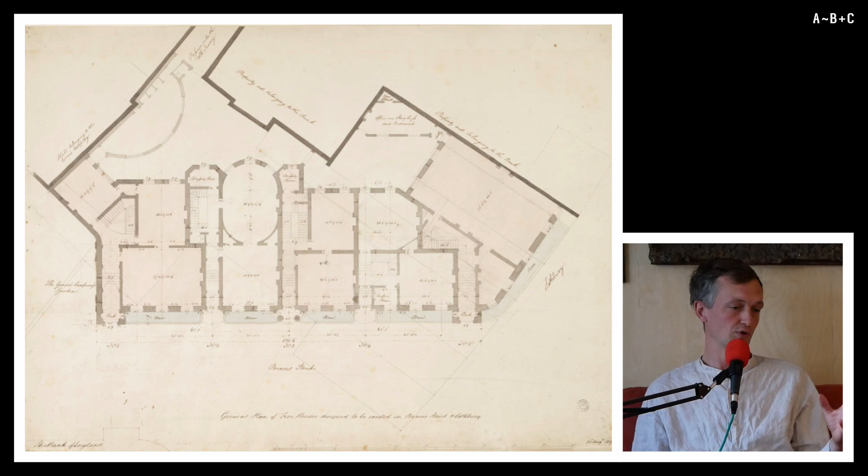You can see it shares DNA with a Nash terrace or a square, but it has some significant differences. There are stylistic differences, but then also it feels like it's not a whole block, but it's a block building. Well, it changes it a lot that it's in the existing City of London, so the geometry of the site is much more complicated. It's going around a corner, and it's a slightly irregular corner, and that's something Soane has to make something of.

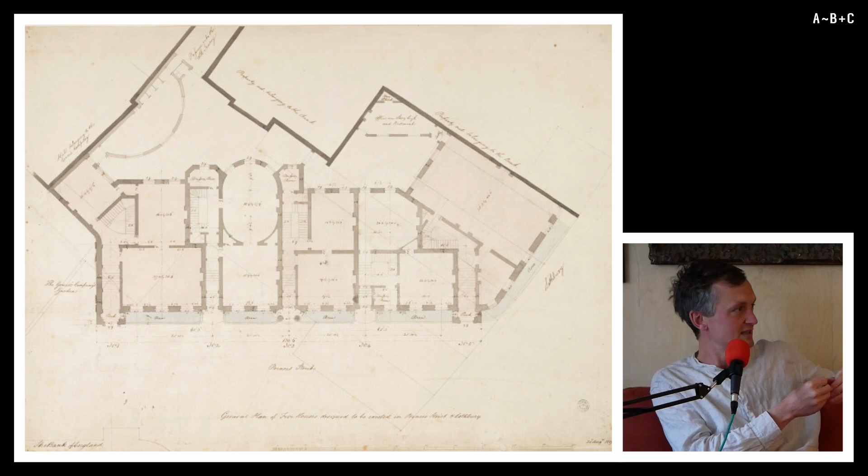The Georgian London we kind of associate more with these new planned squares and urban districts - I guess what it shares with them is they tend to be quite abstract, quite blocky, and they do have some classical detailing, maybe more in the Nash terraces and a bit less in the Bloomsbury type terraces, but it's quite sparing. They're in fact very austere, by and large not all of them, made of fairly austere materials to make money. But they've got to be prestigious - it was successful property development. It's all about creating desirable goods out of not very much, rather than what is the minimum we need for this to become super luxury.

There's a development of 4 houses, and the Georgian house typology is extremely familiar - either 1 or 2 rooms at the front, same at the back, a staircase top-lit somewhere in the middle, and then sometimes an extension on one side or the other. In this case they're tall, lots of floors, regular, but probably grid-only windows. Probably only 2.5 floors of luxurious inhabitation, and the rest is sort of service.

They build quite a lot round the back, and there's a kind of big single-story annex to each of these. In a more conventional case it was the luxury mews - you'd have your coach house round the back. The financial services equivalent of a coach and horses is clerks, who deal in what they call counting houses, which are quite strongly built, top-lit, single-story offices for dealing in cash and valuable goods.

Paper. It's quite a nice plan. He obviously has to deal with this slightly awkward geometry, and he also wants to characterise the houses a little differently in each case. One of the ways he does that is with the staircase. The staircase, as so often in a building, is the freest element. It can be like a triangle, or a sort of pill shape, or even an irregular pentagon thing.

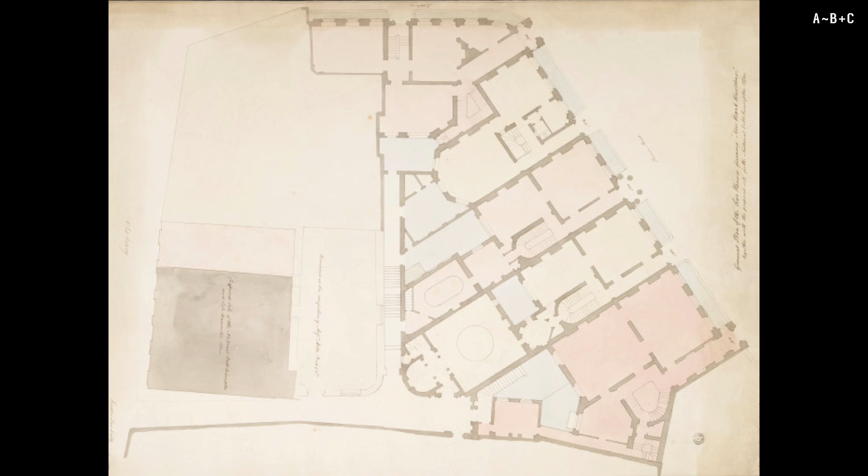But very cool, yeah, a very cool little set of houses, and I think they struggled to let them because they had to charge so much money for them, but they managed to do it in the end. You hear that story about prestigious central urban developments all the time, then and now, and it doesn't mean they don't make loads of money.

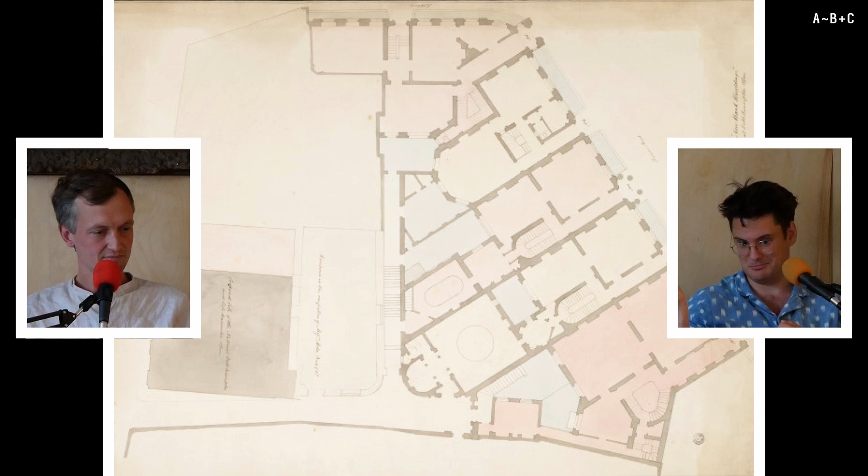The particular plan we're looking at also has this shaded site out to the back of the houses, which is another bit that the bank owned. We should have said there's a whole load of lovely construction drawings that show you the nice interiors you get with these sculptural shaped rooms, often with half-built floors and light coming through them, and beautiful light wells and things, which are the sorts of stuff that we covered in the country house episode, although at a diminished scale.

So yeah, they also owned this site immediately to the rear of the houses, which became the site for something called the National Debt Redemption Office, which I think they were starting to build a tiny bit after this, in the 1810s again, I think. This is technically associated with the Bank of England because it's to do with the national debt, but its purpose is the opposite: it's to pay off the debt rather than to sell it to investors.

This is a scheme which originates with William Pitt, and then there's a guy I think called Richard Price, a contemporary polymath, economist, scientist, crank of the kind people tended to be in those days. As I understand it, they had this clever scheme—obviously it caused anxiety that the state was borrowing so much money, especially for the strain of good and sober government. Their scheme for paying off the national debt, the good and sober way, was that they'd put a little bit of money aside continuously and make compound interest work for them, so the government's money would grow faster than the national debt, and then they'd pay it all off in one go. I may have misunderstood this, but essentially it seems a little fanciful.

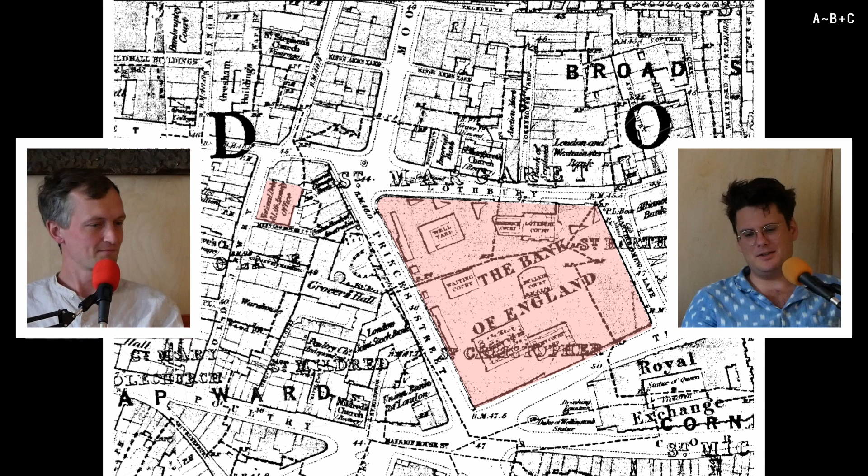What's odd is that the way he illustrates the project doesn't make it seem like he's really thinking about the perceptual qualities of this facade. It almost seems like he's considering it as if it were on a very wide street. One thing you do when a facade is going to be dealt with on an oblique angle is have very shallow relief in the massing, so you can move some bits back a little, which has a much more significant effect than if it was viewed dead on. It strikes me there's a bit of that going on.

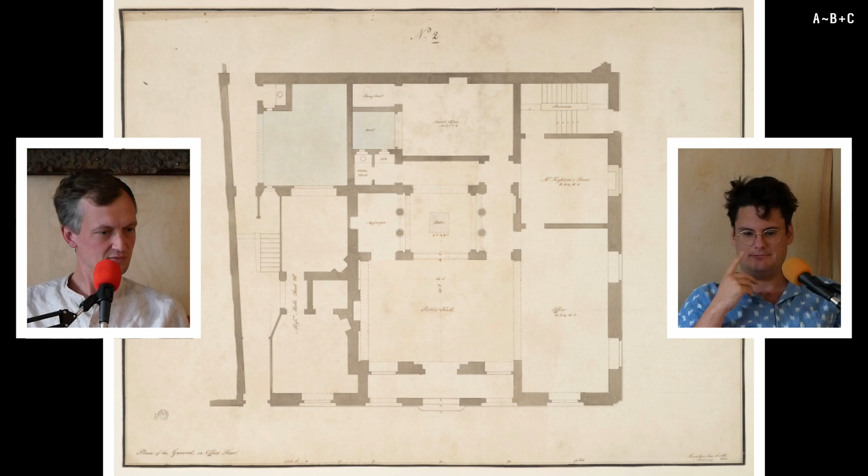So at a certain point, there is a bit of a curveball, which is that they decide it's going to have in the middle of it a mausoleum to William Pitt, to commemorate the founder of this great scheme to pay off the national debt. And the second William Pitt mausoleum that Soane has been involved with. Oh yeah, he did one for the father as well. Yeah, that's nice.

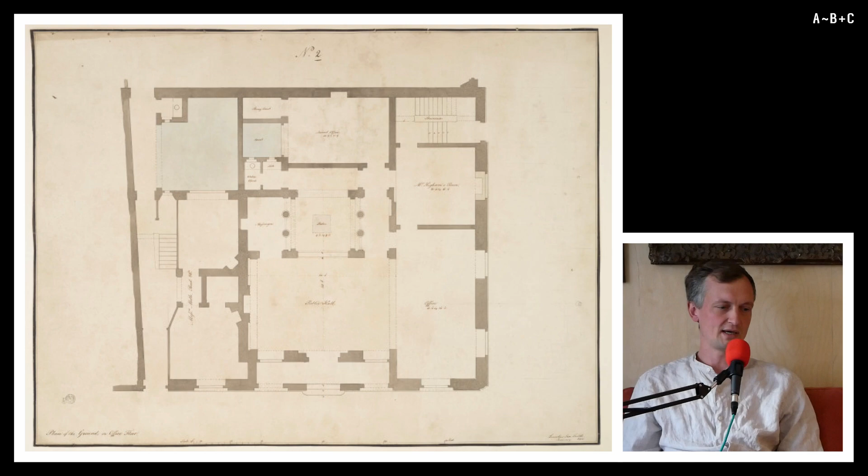So that becomes basically the centre of the plan, where I guess you would have had this kind of light well hall of some kind anyway, normally. That now becomes this sort of quasi-religious shrine element. Wonder if we've got... shrine of a rather pagan character, I would say.

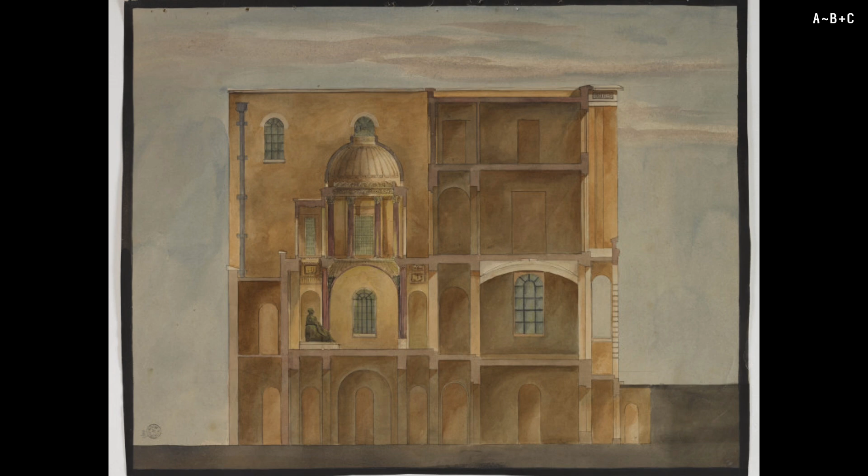Yeah, looking at the section, half of the section is this thing. It's got its own quite grand sort of lantern and low level first floor, or ground floor, upper ground floor, kind of shrine space. The accommodation of the building, there's a semi-basement which is just all service stuff, although it's got some quite fun, kind of quite cryptic detail.

And then the rest of the accommodation is in a U around a square light well. And in the square light well is a little temple with a round pillared dome, which lights a kind of central space with the cult statue at the back. Yeah, the seated Pitt, yeah, in classical garb. And that is the circulating centre.

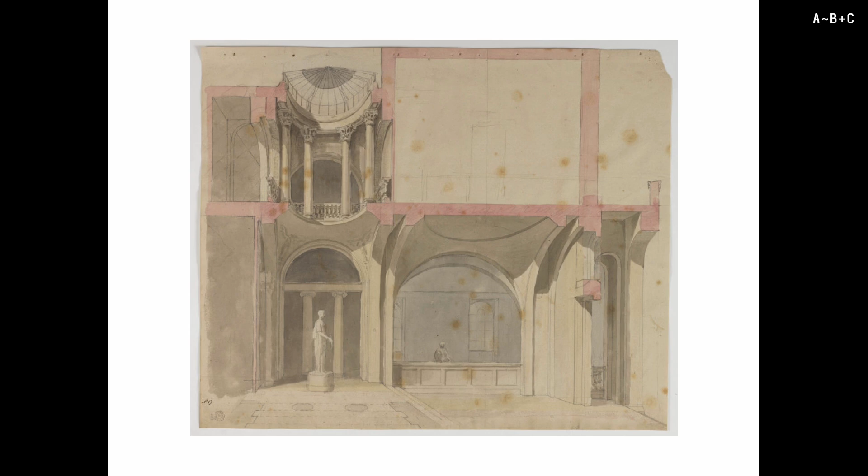But I think in front of him is a light well which goes down into the service... God, or is it not? Sometimes it is, sometimes it isn't. I'm trying to figure out, I haven't been able to. Which one did they do? Which one did they actually build?

Yeah, so we're looking at a painting, a watercolour of an arch, round top arch, looking into this sort of temple, with William Pitt at the back. But the space that we're standing in is the office reception room.

Yeah, it's kind of fun. It's weird, though, isn't it? It's very weird. Yes, weird. So why did this sort of make sense?

Like, this is this fusion of... well, where else would I be going to put it? Yeah, I guess. So this is a kind of institutional building, but it's also a mausoleum.

Fine. Have you ever thought that in institutional and government work, when a project is going through, people will occasionally tack their hobby horses to it as a way of getting things through? I guess maybe, I can only assume that was part of this.

Okay, we've got this... someone's done this statue already. Yeah, we've got to put it in. He's died tragically and young. Yeah, I can't think of any other reason than that. Yeah, it's a very peculiar fusion, very much of its era.

But it leads to a really exciting bit of sectional space, that thing, because this sort of temple light well in the middle of an office building, which is very set up to both illuminate the core of the building, but also illuminate the sculpture of William Pitt.

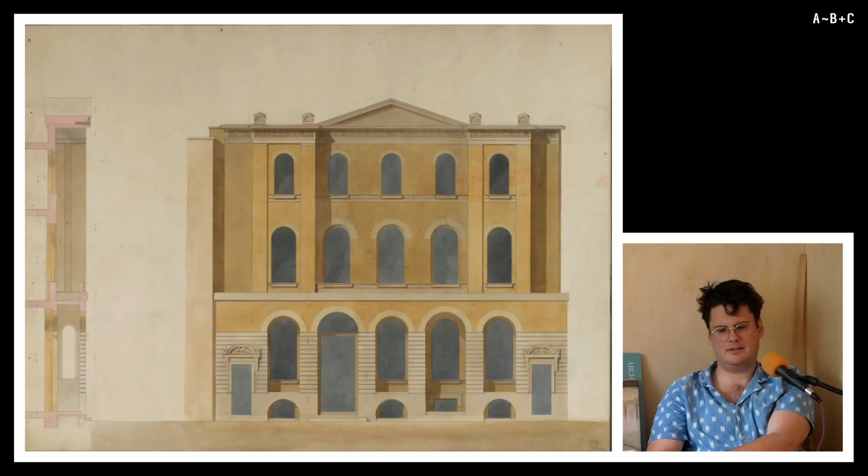It also is convincingly odd. In the images, a lot of these projects actually have real grids and serried ranks of round-topped windows or openings, which he likes to have painted in as if they were completely unglazed black, just looking into a dark void. And that gives the buildings a really strange, powerfully gritty, but also dead-eyed quality.

Look, he's ahead of his time, isn't he? Geometry. It's got an air of the uncanny, as well as the historical nods being almost all sepulchral. I think in those days they might have painted the sashes a dark colour rather than a light colour as well, which would have made them read more like that.

I think that does give them a nice crisp look. It doesn't work so well when all the buildings are actually black already. They were never intended to be black—that's just the environment did that to them.

There's this fun little curiosity I found as well, where he's done two different options of finial type ornamentations on top, but it's quite fun to imagine it being taken literally. One's a little moustache and one's like a little stupa. It'd be quite cute to have one of each. I think they went for neither, please.

So the Chelsea Hospital—there's bits of this one still there, although not very much. There's a kind of overall perspective of the various things he built at Chelsea, which were quite extensive at the time, but significantly demolished and also some blown up in the war. The main bit which survives is the stables—well, some of the stables.

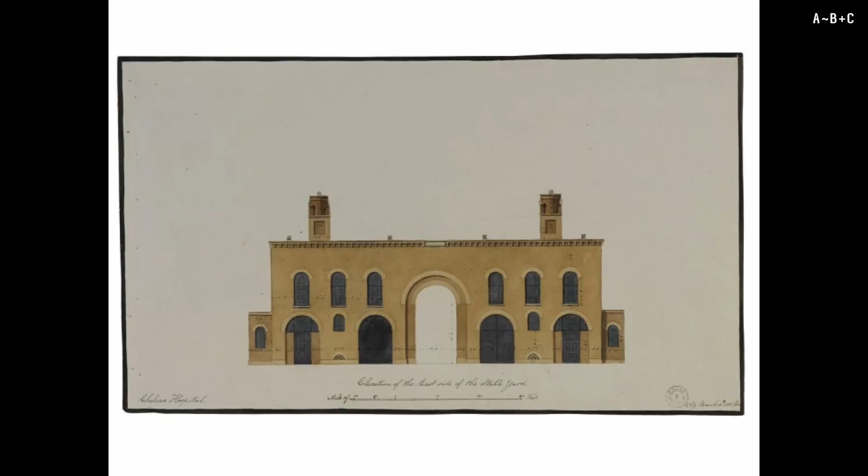Round the back, it's also got this play of all sorts of different arches of different sizes. These are cool, aren't they? Yeah, they are cool. This one is very geometric, like the National Debt Redemption Office. There's a lot of enjoyment of this playing around with these big primary geometries and the openings in them.

What are these? What is this strange succession of doors and windows and blind things? It's a funny lot. So if you imagine the building as being two cubes with a sort of bridge between them...

The top of the first floor of the cube is three windows, perhaps 2.5 times their width in height, with a round top, and then underneath that it's a really big one, which is partially filled in, a really small one hanging high, with a tiny lunette very low, and then a completely glazed reflection of the first one. Strange combination, just sort of starkly presented.

Fun, yeah. It's compositional, isn't it? It's real formal play. I can't think of anyone else doing this until fruity modernism.

You can see why people kind of get back into him a bit in the era of modern architecture, because he's having a lot of fun with pretty abstract geometry. It's interesting that this definitely feels like one of his modes is pure brick, simple geometry.

It's funny though, because as soon as he's allowed to by budget, he'll cover it in crap. He doesn't think this is how cities should be, but if he's forced to, he'll do something brilliant. If he's allowed to, he will absolutely encase it in gubbins. It's very funny.

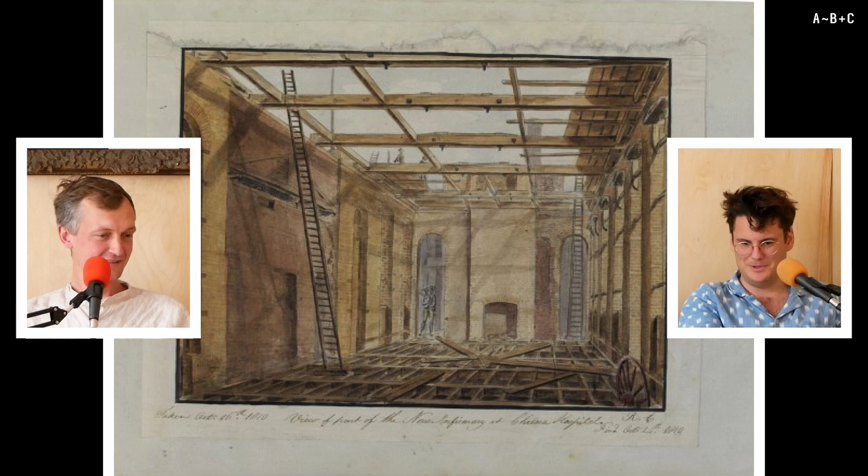Look at those openings at the back - they're so tall and thin. Really cool. It's very daring.

There's some interesting scaffolding going on - there's one of the infirmary going up with a bit of scaffolding. There's not a lot of bracing on that scaffolding, is there? No, you wouldn't want to be on it in any kind of wind, really.

This is... in the late 1820s, he published one of his more widely disseminated books, because he published quite a lot of books where he published one copy and that copy is in the museum. Some of them he published like 30 copies to give away to friends and then didn't give any of them away and instead destroyed them all, or that kind of thing. But this one was actually quite widely distributed. It's his designs for kind of public buildings.

He proposes a whole series of interventions into the public spaces of London to create a kind of monumental order, very much influenced both by contemporary Paris and then also by the French architecture he really likes, which actually isn't contemporary but from the 1750s to 70s. It's what was cool when he was young.

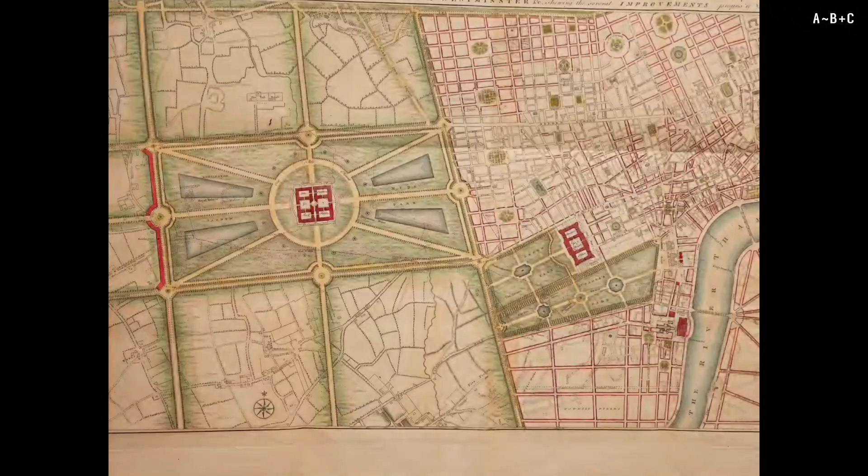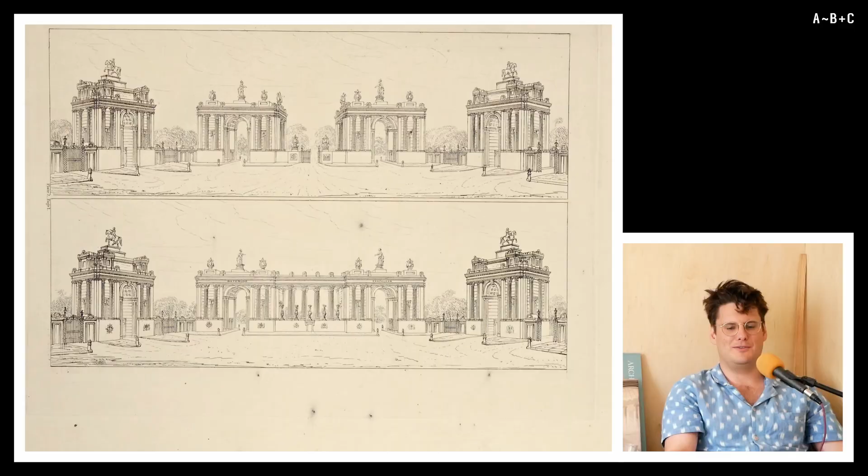The other thing I thought was interesting is that he also had a kind of suggestion for the Bank of England, which was that it should be regularised into a big square courtyard, sort of like a mini Place des Vosges—but it's not big enough for that. No, this is long before—I guess this is even before they'd built the first set of banking halls, when it was really quite a small site at that point. Really twiddly, neoclassical nothings, pavilions, frou-frou.

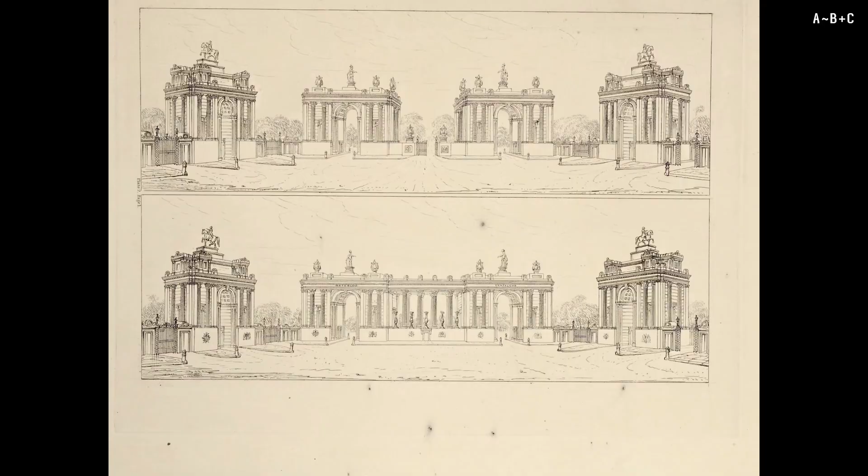It's funny how much effort he seems to put into this. Yeah, it's one of the peculiarities about Soane: if we think about the things about him which we find exciting, his interiors are extremely exciting, his domes and cupolas of all kinds are extremely exciting, his use of brick and the expressiveness of these really simple, stark brick volumes and geometric massing are really exciting. Whereas what he thought would be his great contributions to London were to kind of Corinthianize everything in this extremely bland French style. Bland and weird. Yeah, like, why do you not go through...

He's always being really perverse, as we had right at the beginning with the bridge. It's got the masses in kind of weird places. They're not at the beginning of the bridge, they're at like a quarter of the way down.

They're really strange. Here, you don't go through the triumphal arches, there's a gap between them in the middle. There's 4 triumphal arches, and you go through the gaps between them, more or less.

And why did you have 4 triumphal arches? 2 next to each other, and then 2 sort of 45 degrees canted out from that. It's weird, isn't it? The arches themselves are sort of a strange mixture of styles.

It's got that kind of weird Plečnik in Ljubljana quality. He's like the last diehard classicist in a way, but all his stuff is weird. Like all of the classical proportions are sort of strange. It's weird, classical, OTT, but there's also nothing there. It doesn't make an entrance.

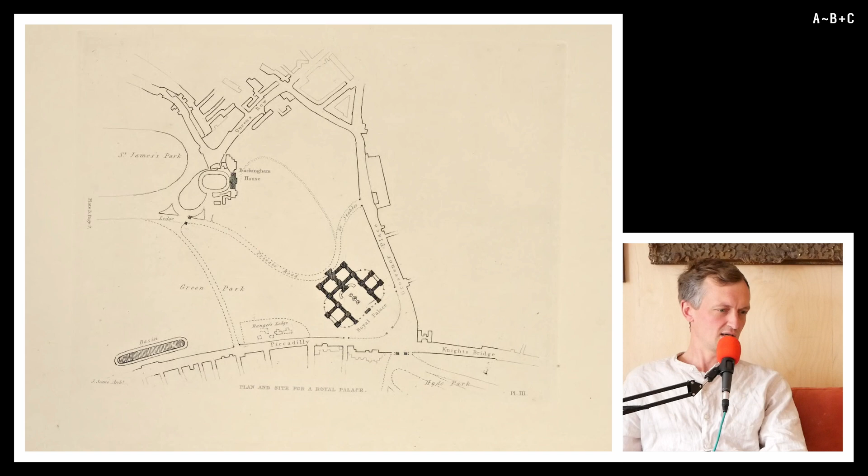When he really dreamed about an architecture with no constraints of budget or site, this is what he wanted to do - these sort of super mega scale stone Corinthian things. It's a weird one. So there's a proposal for a mega palace, which I guess...

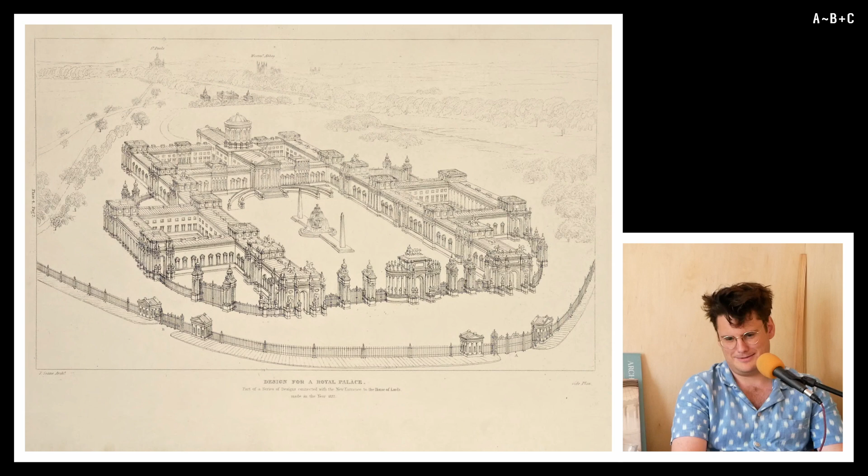At first you look at it and you think, this can't possibly... this doesn't seem like Soane. What is this? And then there are ways that it's like Soane - it's eccentrically antique, like the ruins of Rome.

It's got these kind of broken sets of freestanding columns and things which feel like they're part of ruins. It's a palace with a huge yard in front, a court, but the court is done up like a hippodrome with sort of twin obelisks down the middle.

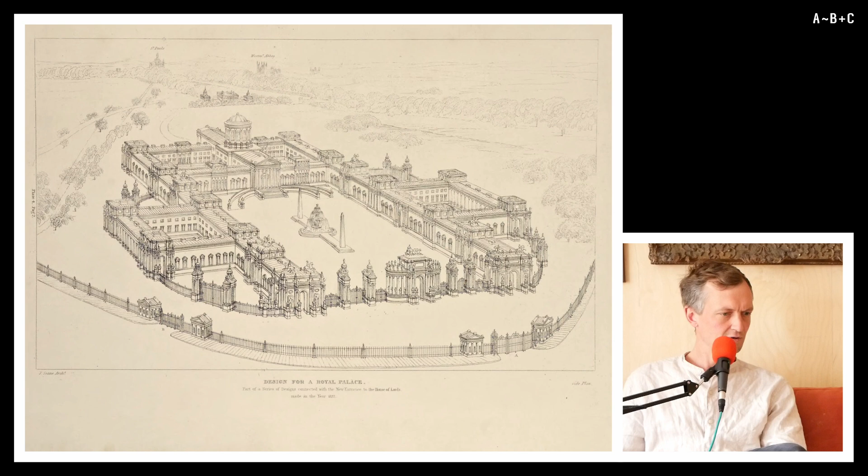Yeah, Ben-Hur-ish. I think all of the windows have round tops, but with detailing on top of them. There's a big dodgy pediment at the end, but then there's a very tall dome with columns at the centre point. Yes, that would be a big light well of some kind. There isn't that much sign of these kind of light well spaces though.

There's a kind of vague suggestion of them. Okay, this isn't good. It doesn't look great, does it? It's not good architecture. No, but it is quite... No, I don't think it's also weirdly single story.

I mean, not quite, but yeah. Quite Beaux-Artsy though, isn't it? Symmetrical, sure. Symmetrical courtyards. It's the most interesting thing you can say about a project, is it's symmetrical. Slightly on weak ground, I would say. Yeah, no, I don't think this is a good one.

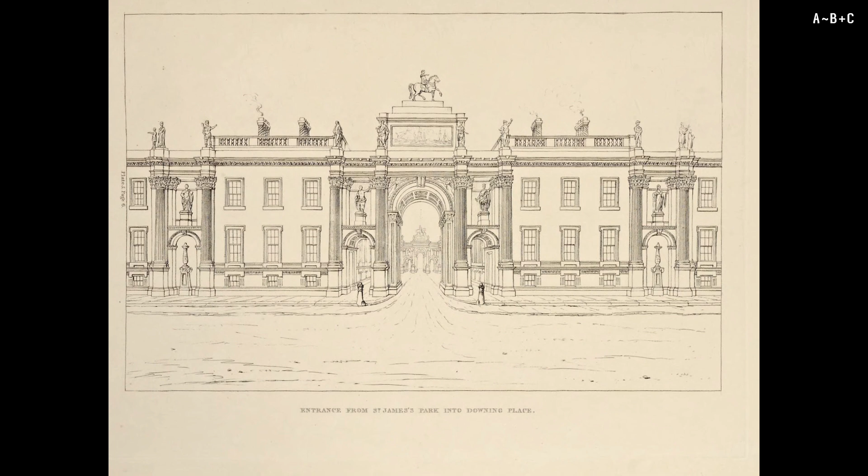This is one we've already talked about, the entrance to Downing Street, but it's kind of reproduced in a new form, souped up. Is that really it? Oh right, so this would have been the other end from the one we were talking about - a second entrance coming from the St James's Park side into Downing Place.

What was he thinking? It's all this kind of empty grandeur, isn't it? But it's energyless as well. And everything is the same - it's one note for the entire monumental identity of the city.

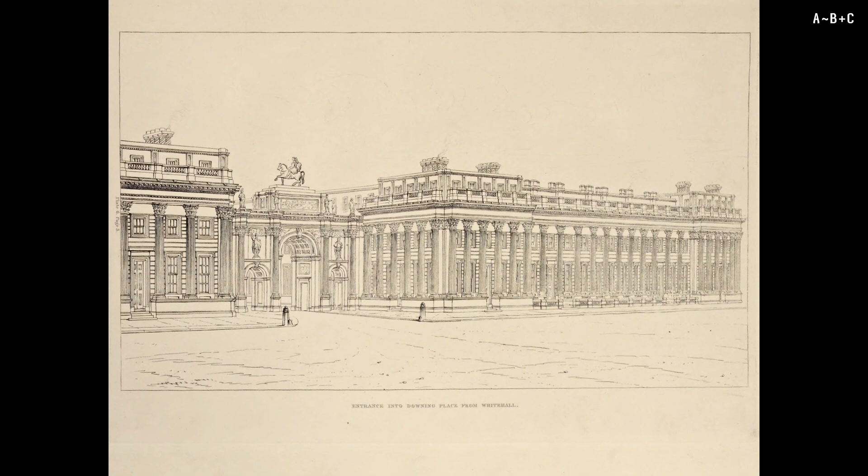Weird. And then this is the one we talked about, super duper duper. The Whitehall end. So another triumphal arch here, with attached columns on the outside. So I guess there's a slight difference.

Do you think he's talking to an audience that really likes this stuff, or do you think this is just what he thinks is good? Because there's a real mismatch to me between the extreme proficiency of the drawings, which look very definite because of the clear line, and the real ropiness and unthought-throughness of the designs being presented.

The finer the detailing you put into an image, the more definite it becomes, the shoutier the graphical quality is - like, this is exactly what I'm going to do. Well, yeah, you ask more questions the more resolved the design is.

I reckon the trad architecture crowd like this. It's got lots of stuff, right? Is this the way that people want the city to look? In one sense, it's also very uniform - everything, like underneath the Corinthian dressing, everything is a cuboid with a grid of windows.

You can vary how tightly packed the Corinthian dressing is. Here you've got paired columns every so often and this triumphal arch motif. I mean, I suppose it would be quite fun, this thing.

It would feel sort of strangely postmodern and awkward. What would happen further up Whitehall? I guess this would just continue. Have you been around Whitehall? It's not great, but it is kind of like...

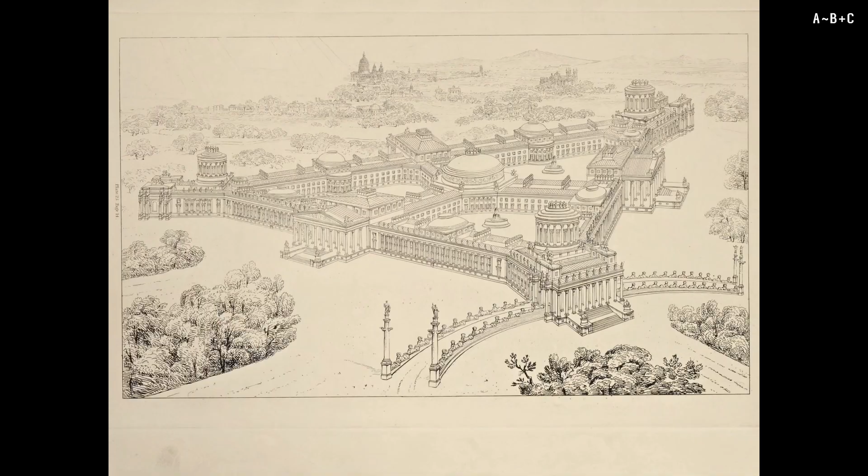There's more. This palace is at least really insane. This is the giant triangular palace we've had earlier. There are some elements, twiddly classical elements, that he has right from the beginning of his career and never abandons, such as the drum with lots of columns around it, a temple on top of a building. Yeah, the big stupa dome. And he also likes doing triangles.

I think the only one he got to build was a sort of little Gothic lodge at Pell Wall. This is a huge triangular palace, there's a lot of architectural language. There's a huge stupa in the middle, so there's a sort of centre stupa. There's a triangular form, and then they're bisected. These three perpendicular wings meet in the middle, so the whole thing is cut into three irregular quadrangular bits. It's shafts all the way.

You get weird neoclassical buildings, like St Hedwig's in Berlin or something, with a huge dome on top, where things feel sort of out of scale or strange. And this is a smashed together collage of interconnecting arms, generic enough that it could be like a run of houses, except in addition to shafts everywhere and lots of columns, there's a continuous band of cake-decoration statues which run all the way around like a crenellation on the perimeter of the building. Nice little job for somebody.